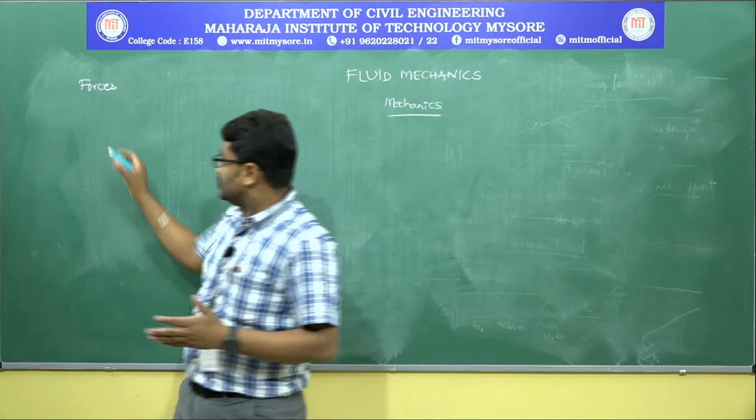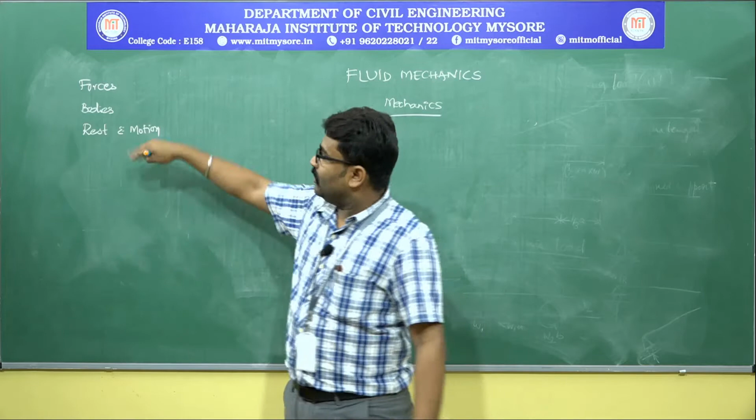You need this word, bodies. Let us see what that is: bodies at rest or in motion. Rest and motion — these are the few things I will take out from the definition. Now I will reformulate, or at least repeat, the definition so I can pick them one by one: Mechanics is that branch of science which deals with the action of forces on bodies at rest or in motion. I have taken out forces, bodies, rest and motion. I will start with rest and motion, then go to bodies and forces.

Now, what is rest and motion? Have you ever heard about it? Rest and motion are said to be relative. That means if a body is at rest, it cannot be in motion, and if a body is in motion, it cannot be at rest. So what is rest and motion?

To study what rest and motion are, you need to know by what method we learn science. We always learn it through two frames: one is time, the other is frame of reference, or space. Basically, it is time and space. So if a body is said to be at rest, it should not be in motion with respect to the frame of reference and given time.

Now if you observe, I am walking in the class. When I walk, what do you say? You must say that this body is in motion. Why? Because this body is not at rest.

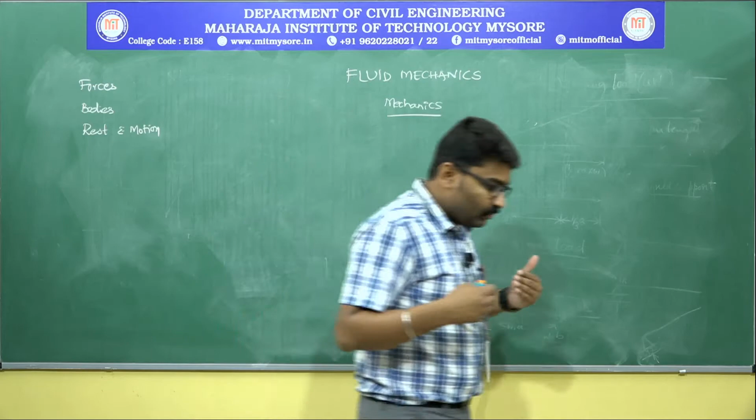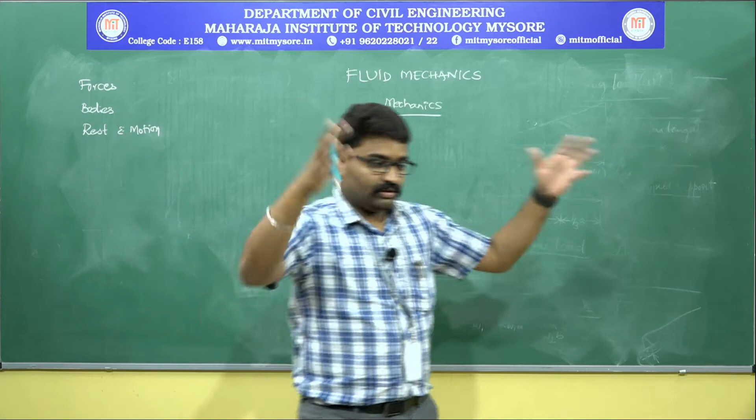From the point where you are seeing, I am moving, but I am situated in a classroom. The classroom is not moving. For a person who is outside this building, this entire classroom is at rest. The body that is moving inside is not visible to him, so this entire room will be at rest for him. So frame of reference or space is very, very important.

And now the same body which is in motion is seen as the body at rest from the other reference. And now after a few seconds I have stopped moving. That means with respect to time, the body that was earlier moving has come to rest. So rest and motion are, that is why, said to be relative.

A body that is moving cannot be at rest. A body that is at rest cannot be moving, but that has to go with the time and space. So how do we define rest? A body is said to be at rest if it is not moving with respect to a particular given time and frame of reference. Similarly, what is motion? Motion is the state of a body which is not at rest with respect to given time and frame of reference.

So now I have told you that after studying rest and motion, I will go to bodies and forces. Even now when I define rest and motion, the body was there. What is the meaning of that body? Anything on this earth which is now considered for the study is supposed to be termed as a body.

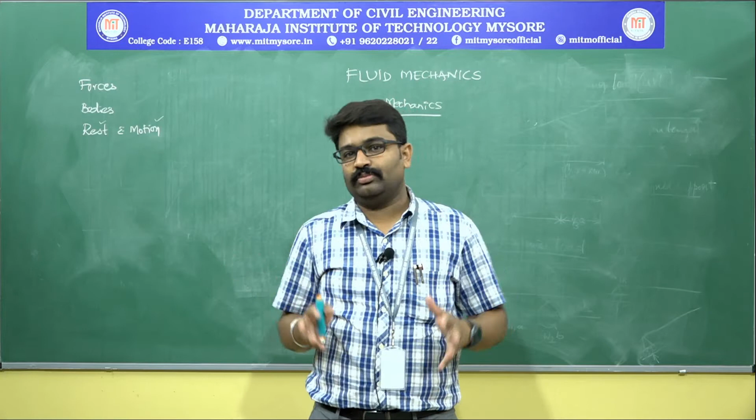A body can be of three types. You know it: solid, liquid or gas. I will come to it a little later because I am still to deal with mechanics.

Now the other part here is forces. What do you mean by force? To know what we mean by force, we will have to dig a little more deeper so that we will know the basics of forces. This is now given by whom? Any action, any external agency that tries to do something can be termed as force.

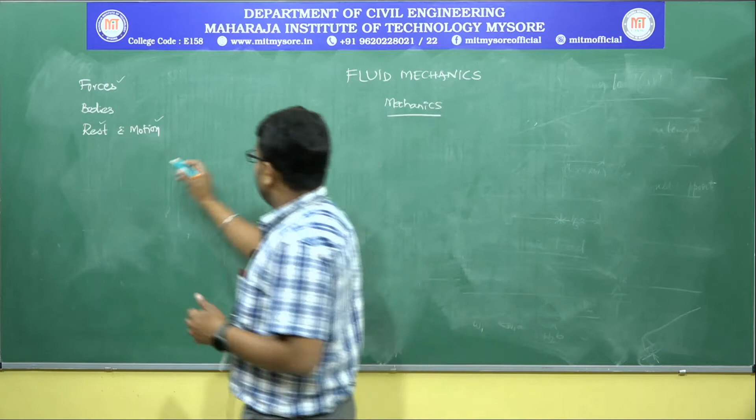Now what do you mean by force is a point of reference for studying inertia also. What do you mean by inertia? Who has given us the content about inertia and force? That is given in Newton's first law. You must have studied this, Newton's first law.

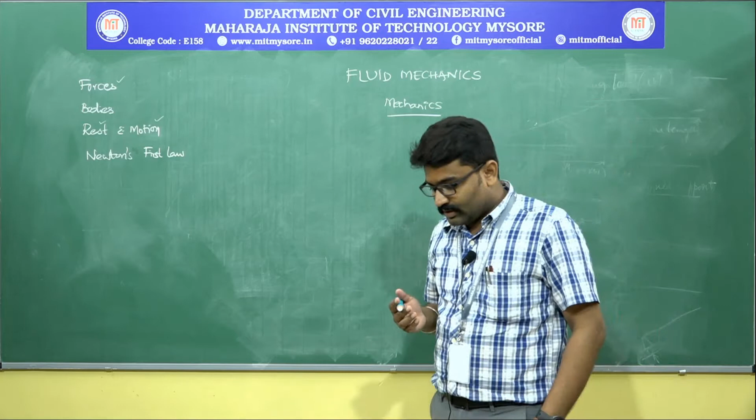What is this law all about? Can anybody remember this? You tell it to yourself because you cannot definitely tell me now. So you can tell it to yourself. What is Newton's first law? Newton's first law states that every body continues to be in the state of rest or in motion unless compelled by an external agency. That external agency is what I am terming as force.

So every body continues to be in the state of rest or inertia, or in motion, unless compelled by an external agency. Say for example, I keep playing on the road. That's an action. Unless I am called by my parents to get in, I will not get in. So that is an external agency. That external agency can be termed as force.

So if you apply some force, it can, see, first time when my parents call, I may not get in. Second time when they call me, then also I may not get in. But the third time when they definitely scold me and call, I will get in. What has changed is the application of force has been changed. The external agency has changed.

So with that I can understand how anything that is applied is a force, but that force can alter the body's nature, or it may try to alter the nature of the body. That means if you are running towards me and if I try to stop you like this, if the force that you are running with is too high, the hand that I am trying to stop you with may not be sufficient to stop your run. So that is only trying to alter the body's motion.

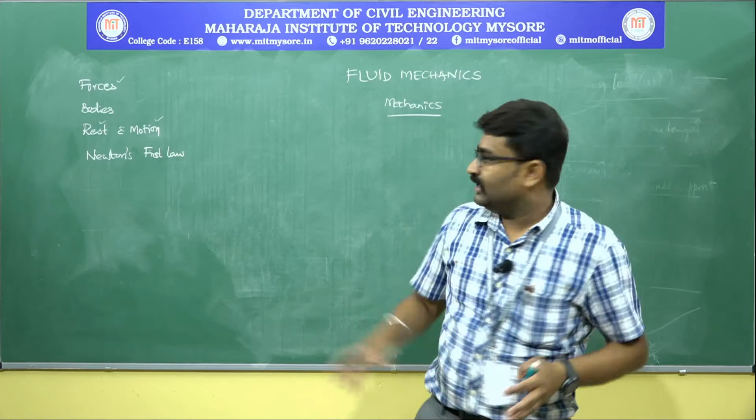And also I may be now asked to lift a big rock. I will try to lift it, but I will not be able to lift the rock. So that is why I am telling that an external agency which is applied on a body may alter its state of rest or motion. If it changes, also it is a force. If it doesn't change, then also it is said to be force.

So now, with Newton's first law, we can now understand the magnitude of force is also very, very important, and the direction of force is also very, very important. I have told you that I will have to lift a rock. To lift a rock, what will anybody do? Even for lifting a paper, say like this, I have a paper in my hand. To lift this paper, what should be done? I will have to give the force from the bottom of the paper. Then only it can be lifted.

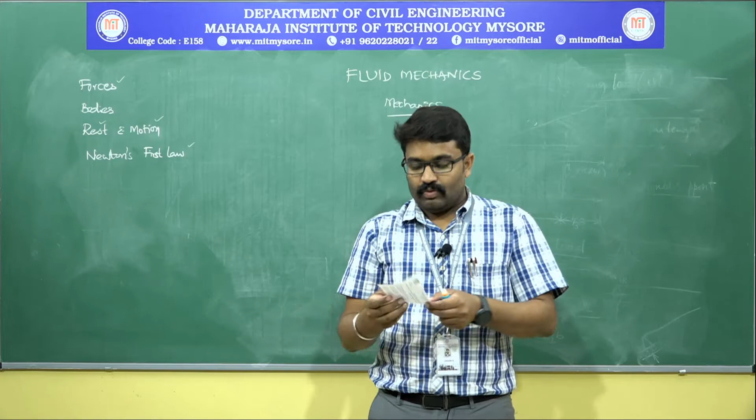So this is the direction of application of force. Instead of this sheet, if I have a 100 kg book or 100 kg block, can I lift it like this? I can definitely try to lift it, but I will definitely not be able to lift it. So what I mean to say here is the force that an external agency applies can try to alter or it can alter. In this case of paper, it has tried and it has successfully altered the position of the body.

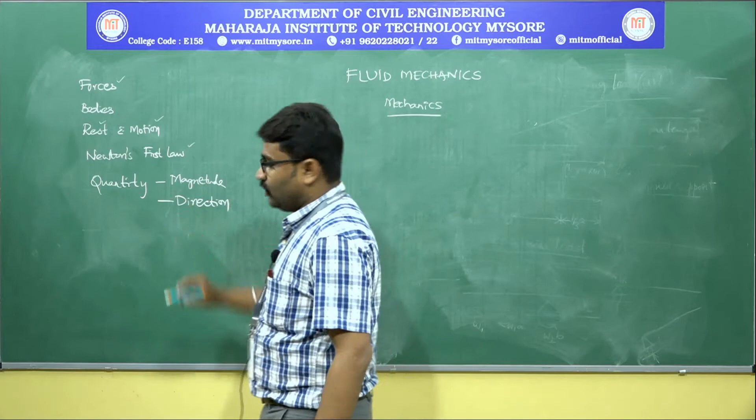Now my point here is, I will have to take out two things from here. One is about the quantity. To quantify anything, you need two things. One is magnitude and direction. So before which I will have to go to the part quantity. What is a quantity? Anything that can be measured is a quantity. How do we quantify? So you have two classifications, scalars and vectors.

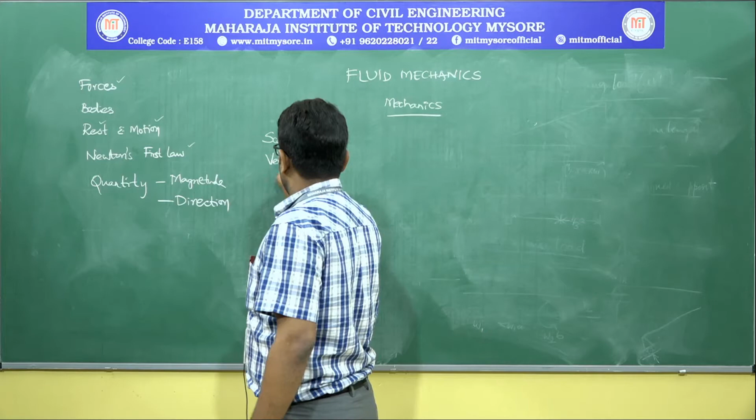What is a scalar quantity? Any quantity that requires only magnitude to represent it is called a scalar. Then what are vectors? A quantity which requires both magnitude and direction to represent it is called a vector. Can you give an example for a scalar quantity as well as a vector quantity? Now I have told you that scalars will have only magnitude and vectors will have both magnitude as well as direction. That is the reason why vectors are also called scalars with a direction.

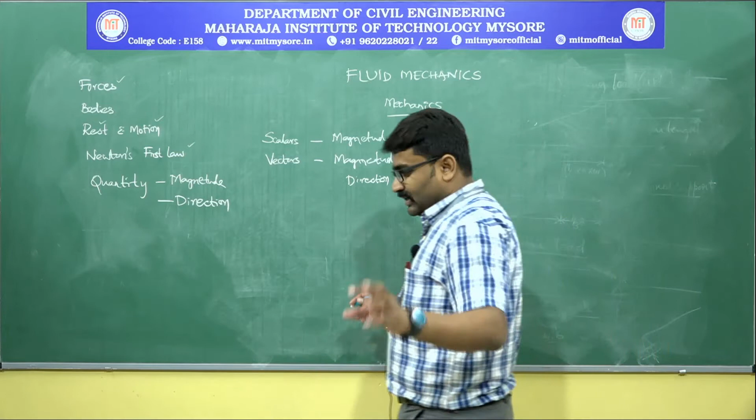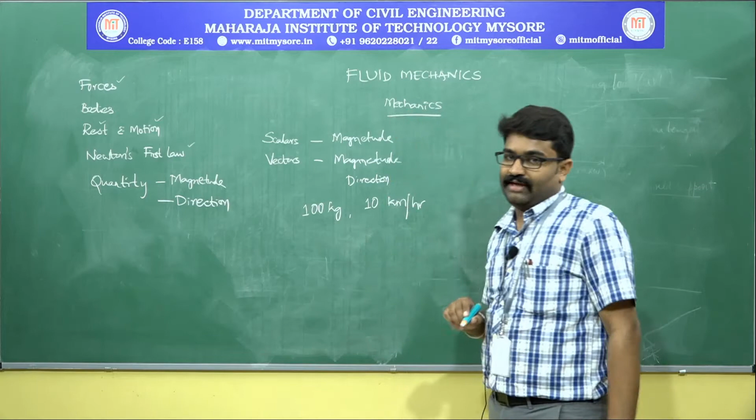Now when I say you have magnitude only to represent them, what does that mean? Let me say that I weigh 100 kilograms and my friend weighs 50 kilograms, and I am running at 10 kilometers per hour. My friend is running at 10 kilometers per hour also. Now I will note it down for you: 100 kilograms and 10 kilometers per hour. These are the two things I have given. 10 kilometers per hour, in which direction I have not told. That means it is only a scalar. So this will become an example for scalar.

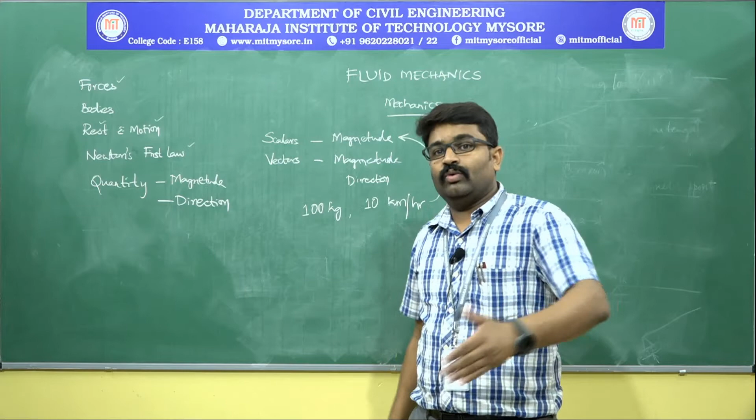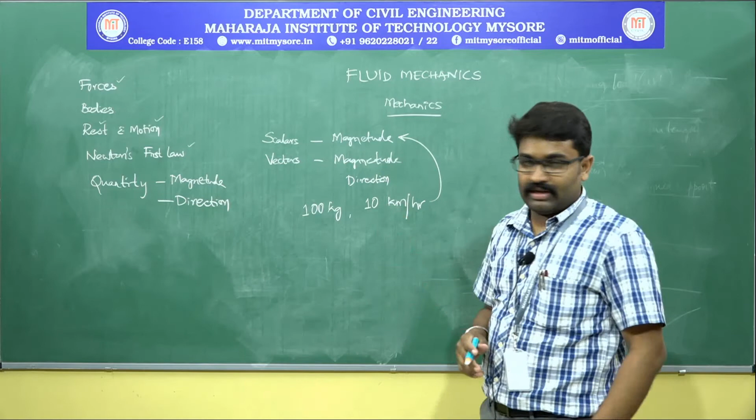Now when I say I run 10 kilometers per hour towards Srirangapatna starting from Mysore, then that becomes a vector quantity, because that is a scalar quantity which has a direction. Now moving ahead, I will have to give you examples for scalars and vectors. So one I have given, that is distance and displacement. Distance is an example for scalar.

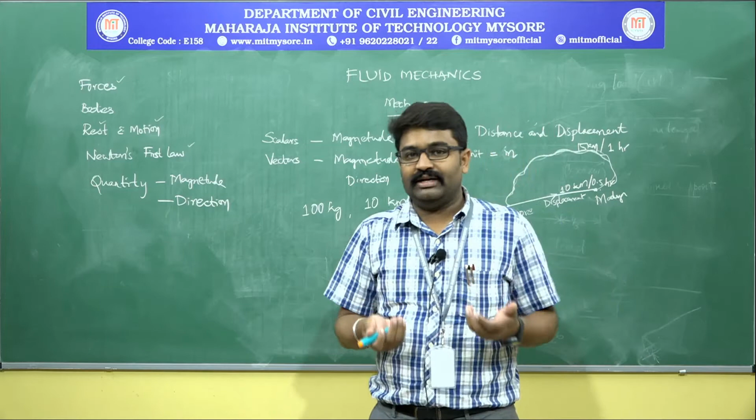Now I will continue further digging into it. I will start from here and cover these 15 kilometers in 1 hour. Say I am cycling, that is why I am taking 1 hour. From Mysore to Mandya, the shortest distance to my college, 10 kilometers, I have travelled in half an hour. Let us assume like that. Now why does this always come combined with time? Because when we are travelling in a bus or train to Bangalore, we say we will reach in 2 hours or 3 hours. That means the 150 kilometer distance between Mysore and Bangalore is covered in 3 hours. So the distance travelled by time taken is called speed.

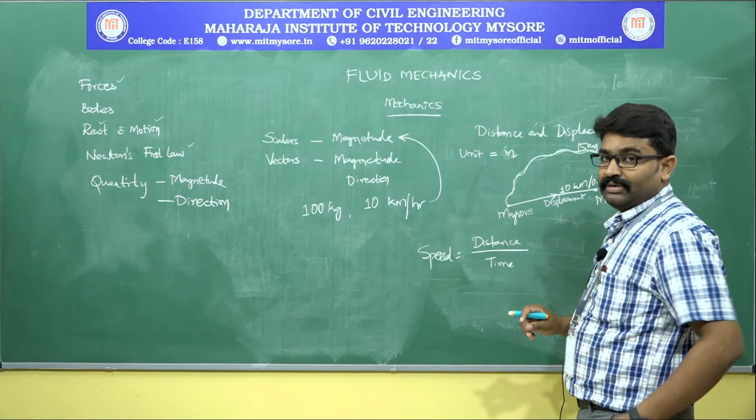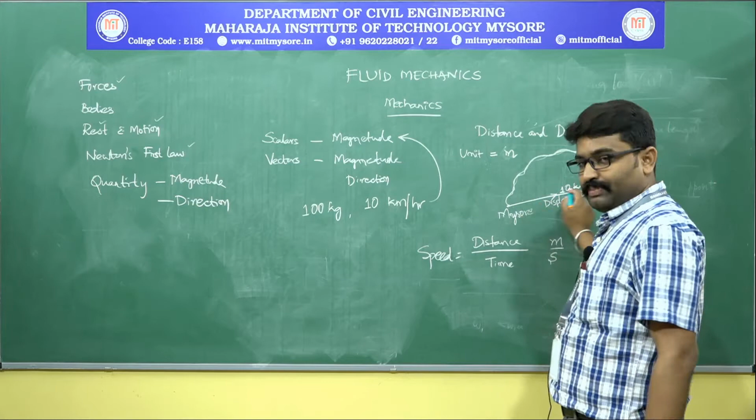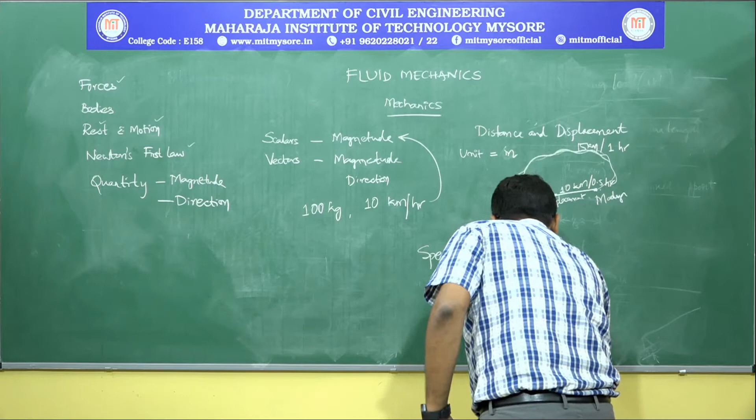Speed is nothing but distance travelled per time taken, or time taken to cover a certain distance. The unit will be meter per second. Similarly, I have told you that this is the displacement, that is the shortest distance between the 2 points. So, displacement by time is called velocity. I have told you that displacement also has the unit meter. So, unit of velocity is also meter per second.

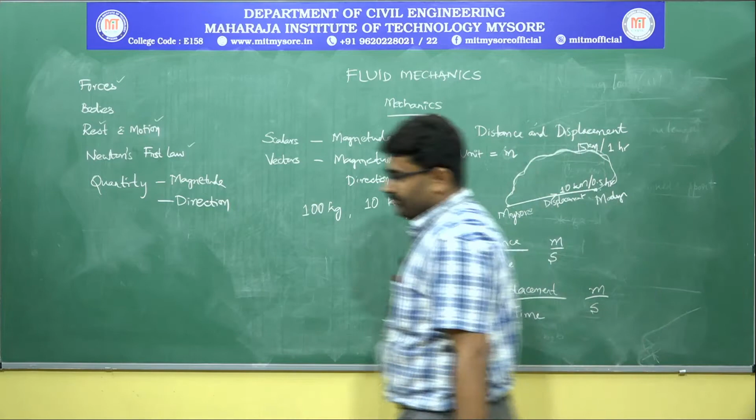So, what have we learned till now is first the definition of mechanics. In that mechanics we had rest and motion, and then we went to forces, studied Newton's first law of motion, and then there came the quantity. So, the quantities that require only magnitude to represent them became scalars, and those which require both magnitude and direction became vectors. I will write them also, scalar and vector. As examples to them, I have taken distance and displacement, and then I took speed and velocity.

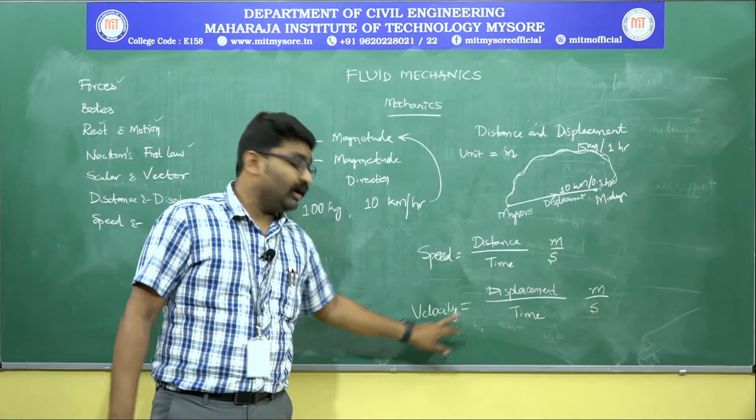Now, can anybody tell to themselves what quantity is speed? Whether speed is a scalar or vector? Speed means distance by time. So, the speed has only magnitude but no direction. That means I am running at a speed of 10 km per hour will only signify a scalar because it is not having any direction. But I run 10 kilometers per hour starting from Mysore towards Srirangapatna has a clear direction as well. So, that means velocity becomes a vector quantity. Speed, velocity, and I will have to next teach you what is acceleration.

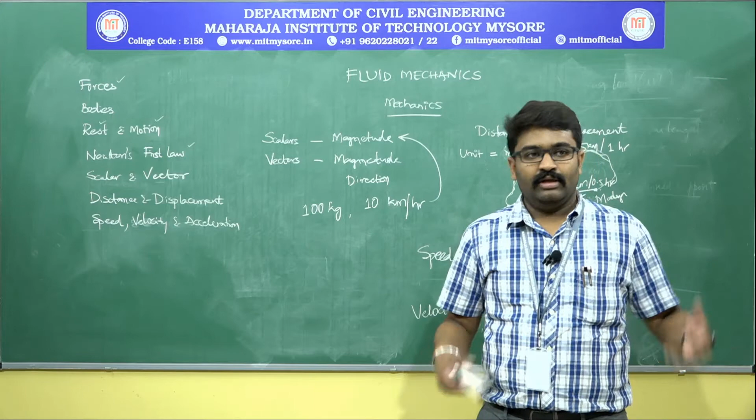Assume that you are driving your vehicle from your house to your friend's house. You are riding at 50 km per hour. Your moped is being run at 50 km per hour. You see an empty road, there are no vehicles from the opposite direction, and you wish to increase the speed. So, obviously you will use the accelerator of your vehicle. What is it actually doing? It is increasing the velocity of your vehicle.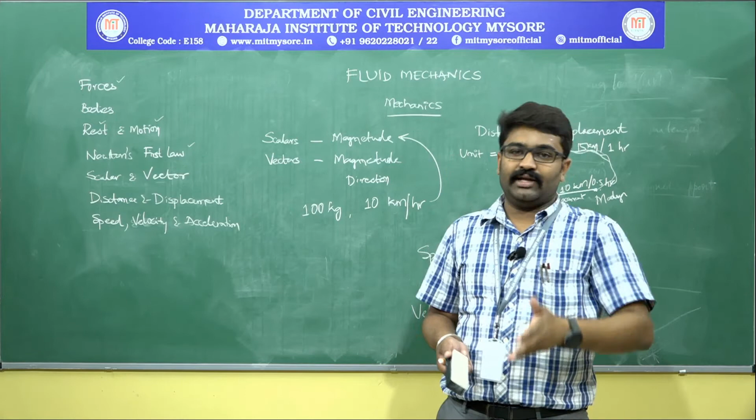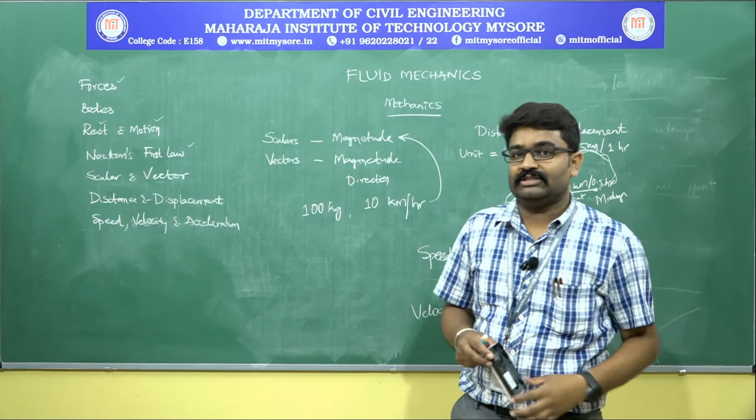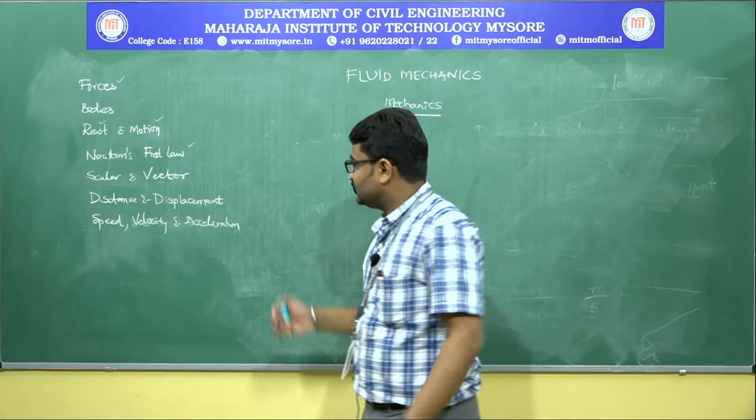Why I say velocity and not speed is you are moving in a particular direction. In the same direction, your speed has to increase. That means velocity has to increase. That cannot be termed as speed because it has a particular direction. Your velocity has to increase in that direction. So, you will accelerate. That means what is acceleration? The same distance is being covered in a short time. That means the rate of change of velocity is called acceleration. The rate of change of velocity. Okay. Whenever you have rate in the definition, you will always have time in the denominator.

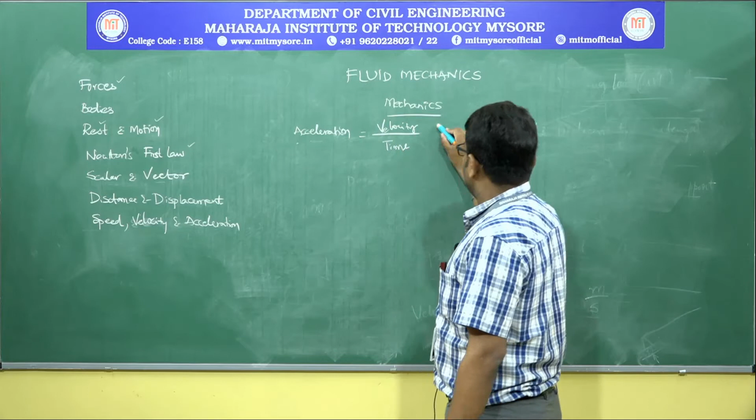That means acceleration is rate of change of velocity. That means velocity is in the numerator, time is in the denominator. So, what is the unit of velocity? Unit of velocity is meter per second, unit of time is second. So, it becomes meter per second square. This is the unit of acceleration.

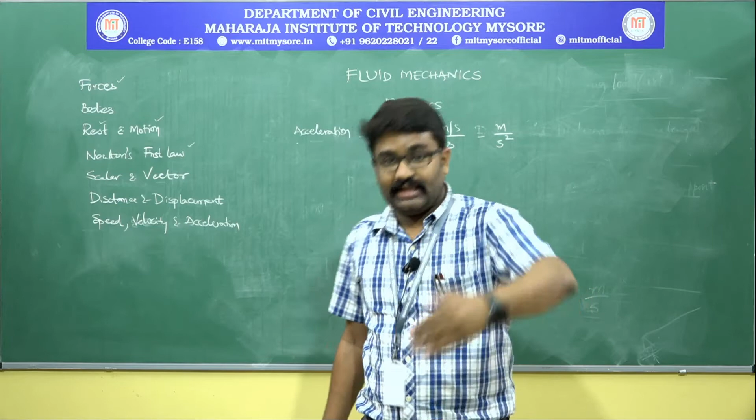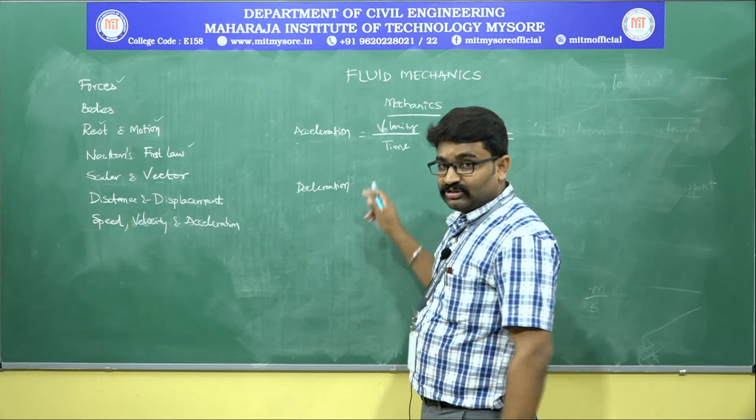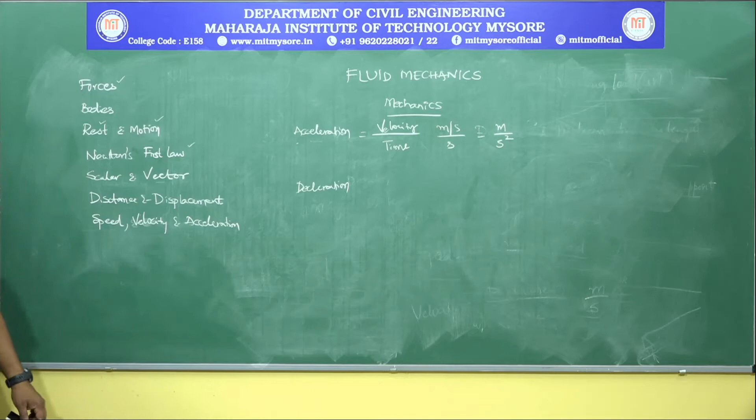Now, I have given you an example of an empty road wherein you would wish to increase the speed, but when there is an opposite vehicle or a dog that comes without your notice, immediately what will you do? You will have to apply the brakes and automatically your velocity decreases, but that velocity is still in the same direction. But whenever you will move in the opposite direction, then it becomes deceleration. Deceleration or negative acceleration, that also has the same unit, but it will come with a negative sign to signify it. So, speed, velocity and acceleration, and next we will move on to momentum. What is momentum?

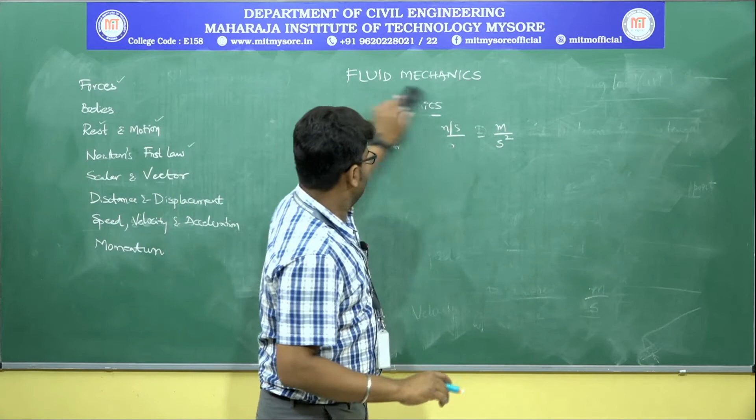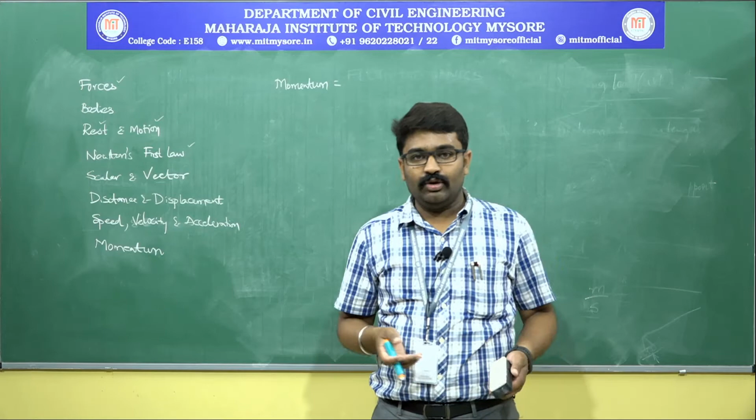I hope many of you watch a cricket game. During the commentary, you might have heard that some ex-batsman has entered the crease and he has changed the momentum of the game. What does he actually do? Say for example, the score of Indian cricket team is at 3 runs per over. Now, immediately a hard-hitting batsman comes on a given good day, he starts hitting the ball and your run rate has increased to 4.5 in 3 to 5 overs. So, by virtue of his capacity of playing good cricketing shots, he has increased the run rate. So, he has brought in some force.

So, momentum is nothing but mass, that means the quality of the player, let us assume, into what has he done? He has increased the scoring rate. So, I will take it as velocity. So, momentum is nothing but mass into velocity. So, what should be the unit of this mass into velocity? Mass has a unit of kg, velocity has a unit of meter per second. So, momentum is mass into velocity in kg meter per second. Why is this important in learning? With the increase in mass, the momentum will change, or if the mass is constant, with the increase in velocity, the momentum will change.

Or basically the definition goes like this: it is the capacity of a body to impart motion to other body or impart force onto other body. In the example that I have given, the batsman has come and started hitting, that has not just improved his batting rate, but also has increased the team's batting tally. That means it had the capacity to impart motion to the other body.

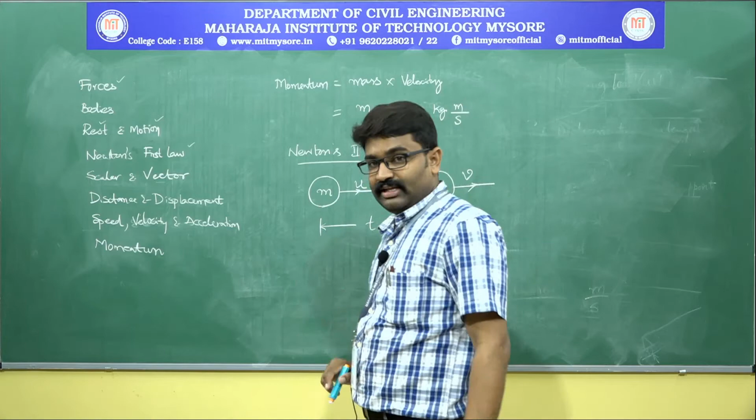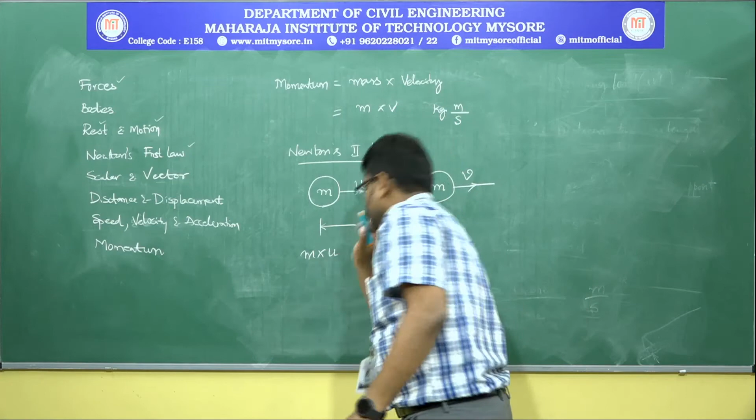So what is the momentum at this point? Momentum is mass into velocity. What is the velocity here? Velocity here is u. What is the mass of the body here? Still m, but velocity has changed to v. What does Newton's second law state? The rate of change of momentum. Be very careful, it is rate of change of momentum. I have only written momentum here, you will have to take the change in momentum. What is the change in momentum?

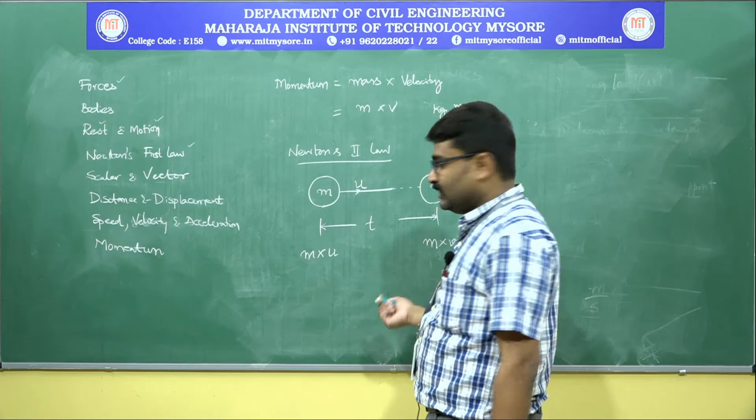Say you score 56 in a subject, and in the next you score 66. What is the change? It is 66 minus 56. Similarly here, change in momentum is equal to final momentum m into v minus initial momentum m into u. But the definition says it is rate of change of momentum.

As I already told you, when there is rate in the definition, you will have time in the denominator. So mv minus mu; I will take m outside, m into v minus u divided by time. The time interval here is t. m into v minus u by t. But what is v minus u? v minus u is change in velocity. In the denominator you have time.

Recall what I taught you in this class itself. This is nothing but change of velocity with respect to time, which is acceleration. So this can be written as m into a. This is Newton's second law. But it doesn't end here, because according to the law, this rate of change of momentum must be proportional to the applied force, in the direction of the applied force. So m into a must be proportional to the applied force.

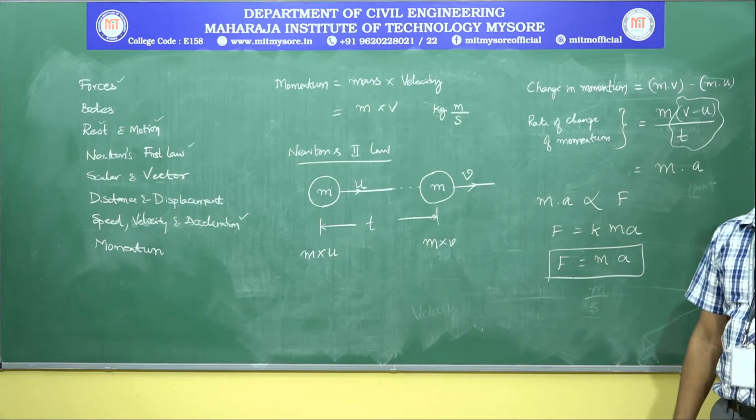To remove the proportionality, I bring in the constant of proportionality: F is equal to k into ma. When k is unity, you have the actual output of Newton's second law, that is F is equal to m into a. This is a very important part in learning fluid mechanics. Please keep this in mind. Force is equal to mass into acceleration.

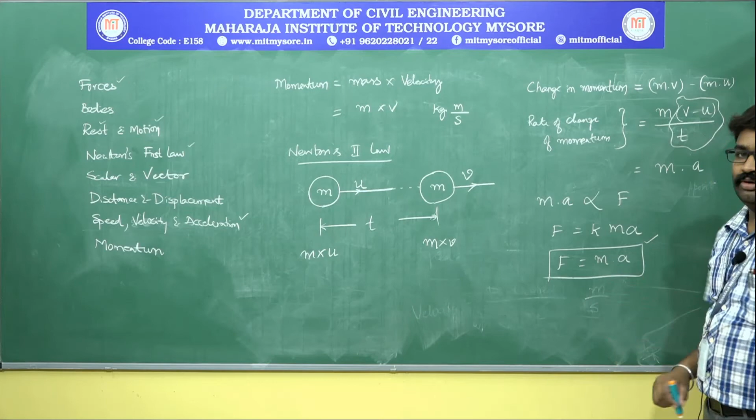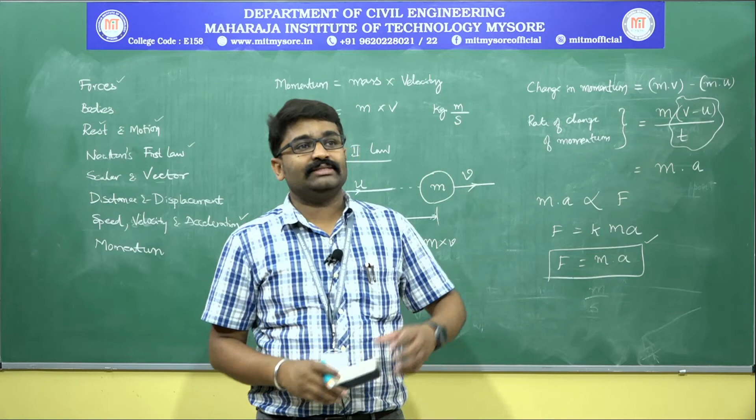You must have already learnt about acceleration due to gravity. Acceleration due to gravity is the pull of the earth due to its gravity, usually termed g. I will come to it later because I will have to deal with mass, weight and volume; when I come to weight, I will tell you why g is important. For the time being, remember F is equal to m into a. So after momentum I will write Newton's second law.

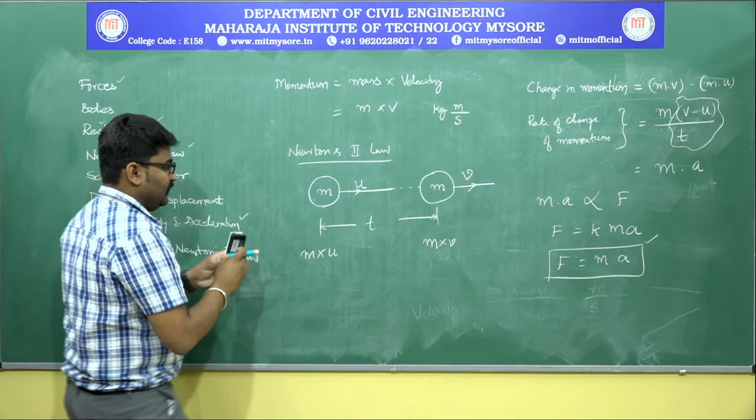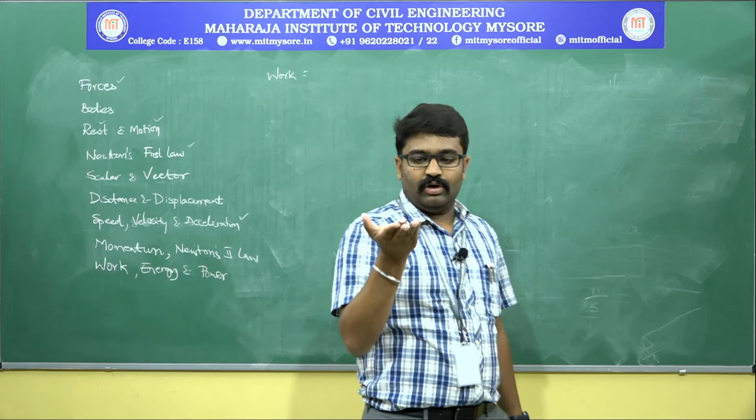Next, in the basics you will have to know about work, energy and power. We'll first take up what is work. Now I am holding a piece of chalk in my hand. This is work, and if I have to place this from here to here, this is also work. If I have to place this from here to here, then this is also work.

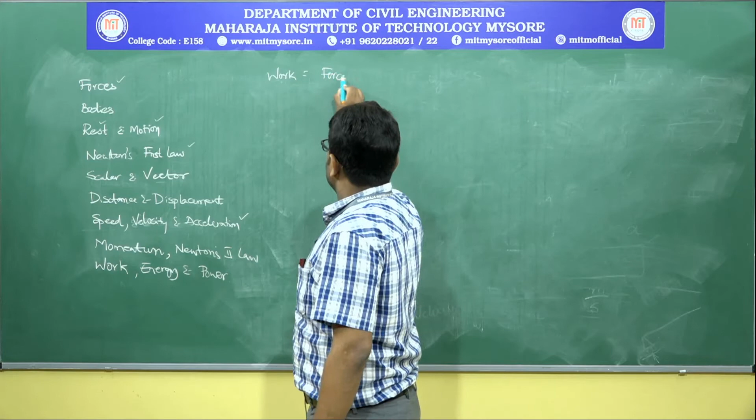Basically what is being done here? Basically I will have to be able to lift this piece of chalk and move. So some force is required, and with force what is happening? Now force is being applied to do what? To displace this from one place to other place. Now I have gone backwards, now I am coming forward. So there is a displacement, clear displacement. This is happening because of the force being applied.

So work is nothing but force into displacement. Force into displacement. Force has a unit called Newton that came because of the previous derivation that I have done. Newton's second law, wherein F is equal to ma came, that was found by Newton. So force has a unit of Newton, that I did not write. If you want I will show.

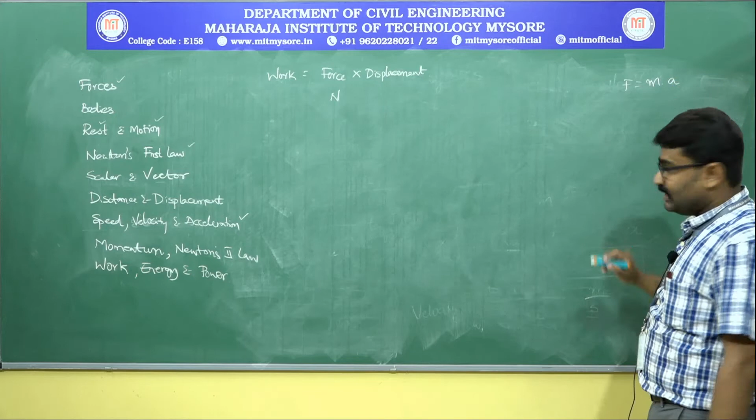F is equal to m into a was the output of the previous derivation. M is in kilogram, acceleration is in meter per second square. Since Newton found this, put together this is called Newton. So force has a unit of Newton, displacement is in meters. So work has a unit of Newton meter.

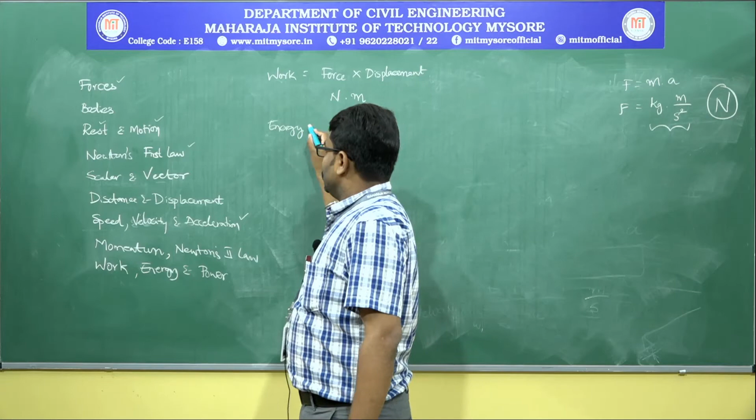And next in the line I have energy. What is energy? Energy is nothing but the capacity to do the work. That means any work can be converted into, in fact I will have to go the other way, any energy is nothing but the work. The capacity of doing it is called energy. So it has the same unit, Newton meter. But in energy you have two famous types. Everybody will answer this. One is kinetic energy, the other one is potential energy.

What do you mean by potential energy? Potential energy is the energy gained by virtue of the position of the body, whereas kinetic energy is the energy gained by virtue of the motion of the body. So potential energy is dependent on its position, where h is the height, that means the position of the body. Mg is nothing but the weight of the body, whereas kinetic energy is half mv square, where v is the velocity. It depends on mass and velocity of the body.

And finally you have power. Rate of doing work is called power. Whenever there is rate, I have told you that in the denominator you will have to have time. So what do we have to have in the numerator? It is rate of doing work. That means work. Work by time, that is nothing but Newton meter per second. So this is nothing but the power, rate of doing work.

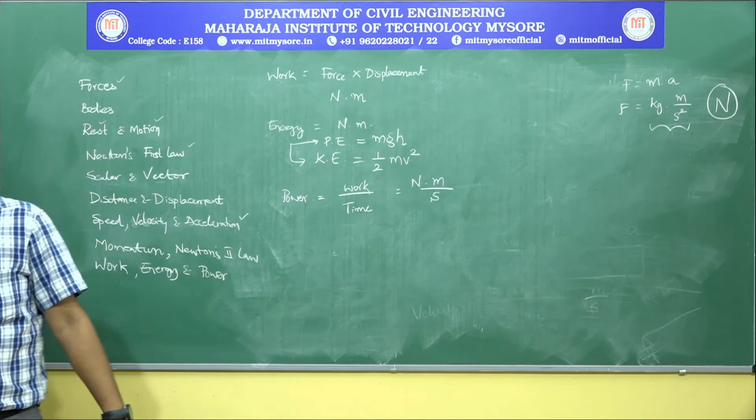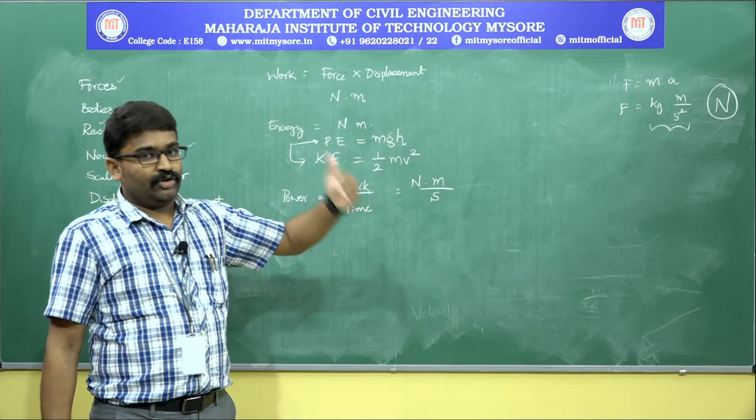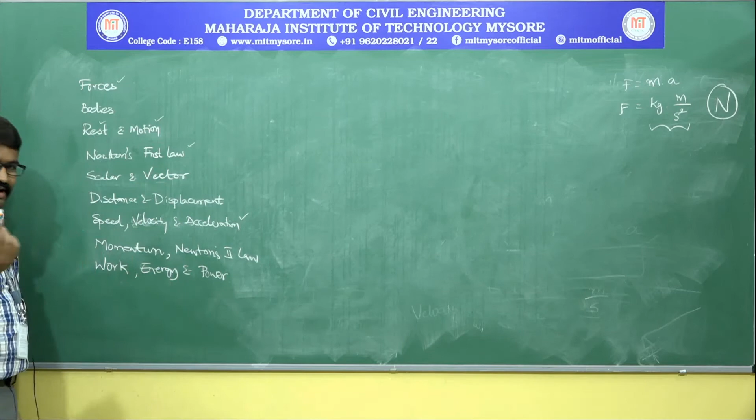So these are the few concepts that you must know before entering into the other part of the title of the course, that is fluid mechanics. I have just elaborated about or taught you about the mechanics part of it, and now we will move on to the other part, fluids. Before I get into fluids, I think I must also let you know what is mass, weight and volume, because I have already used mass as well as weight in this class itself.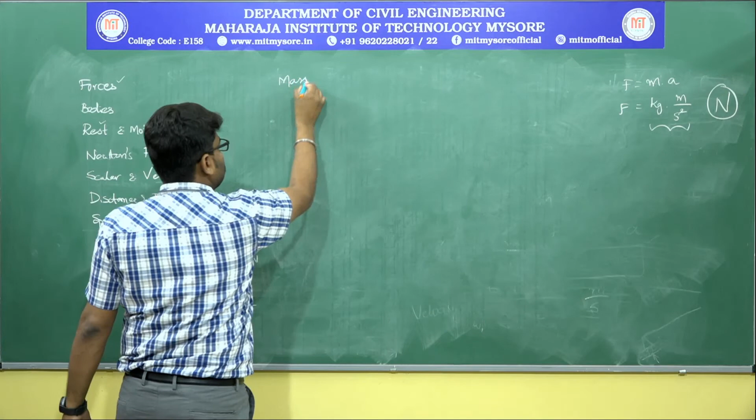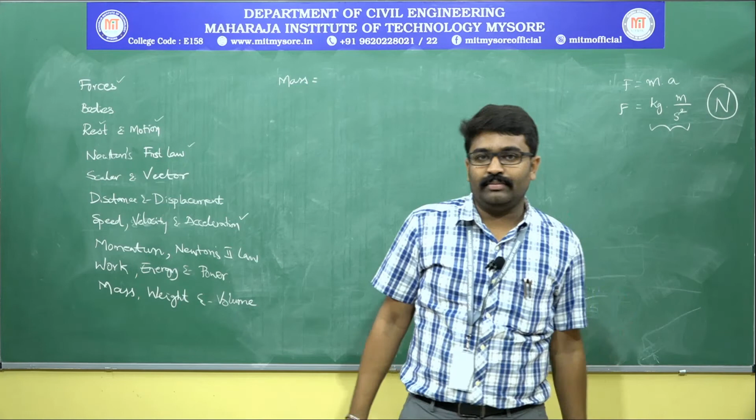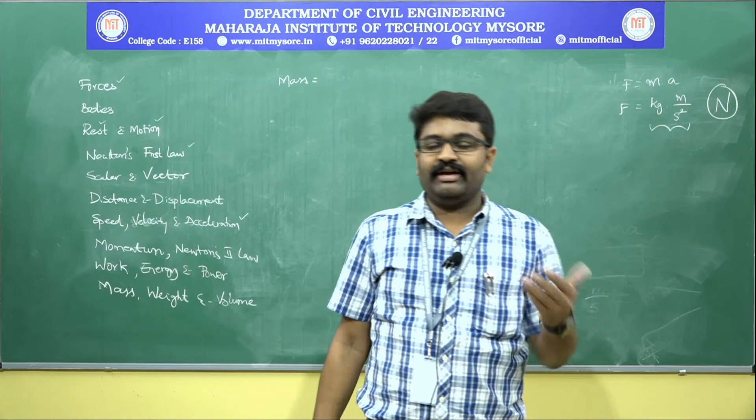What is mass? Okay, I'll have to pose a very simple question here in Kannada, "nim tooka estu." This is a common question that you will come across. What does that tooka mean? That means, is it a synonym to weight or mass? That is the question that must rise. Whenever somebody asks us what is your weight, the quick answer would be say 80 kgs. Is that correct? That you will learn now.

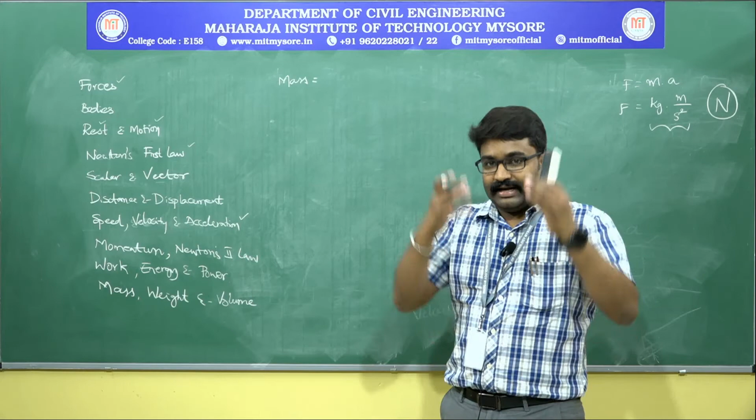That is basically incorrect. What we are answering is mass and not weight, because mass is the measure of amount of matter contained in a body. Say this is a body. I am made by what? Blood, other muscles, bones, all those things. It is the measure of amount of matter contained in this body, and that doesn't change. If I jump, my mass doesn't change, because the amount of matter contained in the body doesn't change.

So what we answer whenever we are asked about our weight is actually the mass. Unknowingly we are doing that. We will have to change from now, but people will not accept that answer. I will tell you why. Mass is the measure of matter contained in a body, and its unit is kg.

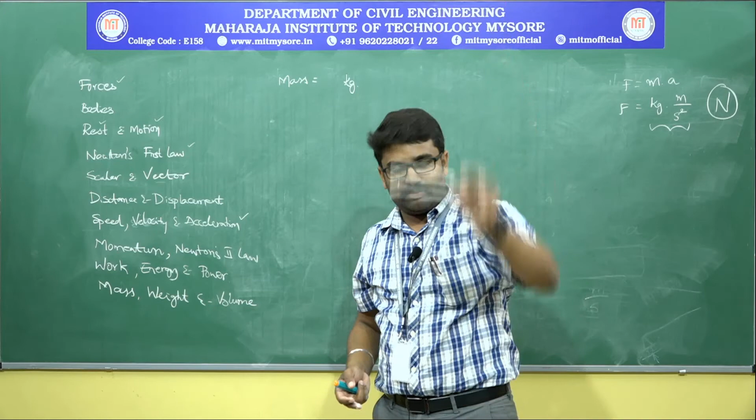And now if I throw this duster up like this, it has to fall down. Why is it falling down? It is falling down because of the acceleration due to gravity. But does the mass of this duster change just because it went up and came down? No. So mass is not changing.

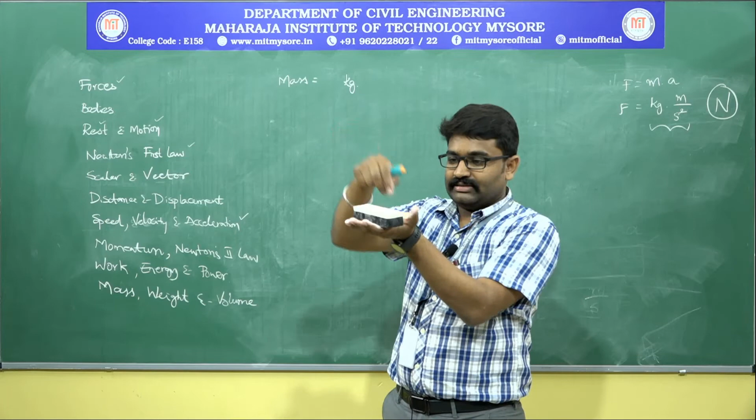But what is changing? Say for example, this duster, when I lift this up and put it down like this, the force that I am feeling on my hand is less. But when I put this up from a greater height, the force that I feel here will be different. And now this same mass is multiplied by the acceleration due to gravity; mass is m, acceleration due to gravity is g.

You must now relate this with Newton's second law, which said F is equal to m into a. Here instead of F we will write weight. That means to say weight is a force. How? Because this is mass multiplied by acceleration. Here acceleration due to gravity is the only change. So this must also be in terms of Newton.

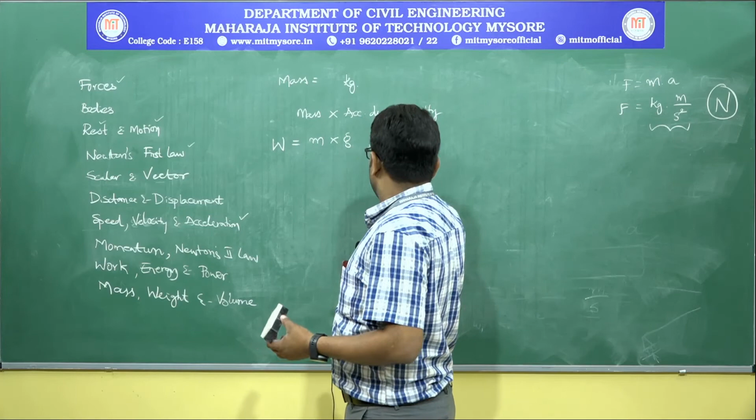So what is the difference between mass and weight? Whenever somebody asks your weight, if you put it in terms of Newton, people will laugh at you. Don't do it. But as a civil engineer, you must know this fact. Weight has a unit of Newton, and mass multiplied by acceleration due to gravity gives weight.

And then finally you have volume. You will all have seen the sumps in your houses or water tanks, or to give you a bigger picture, the lakes. Since you reside at Mysore and near Mysore, you have many tanks. Kukkarahalli Lake, Karanji Lake. All those things have a capacity to store something.

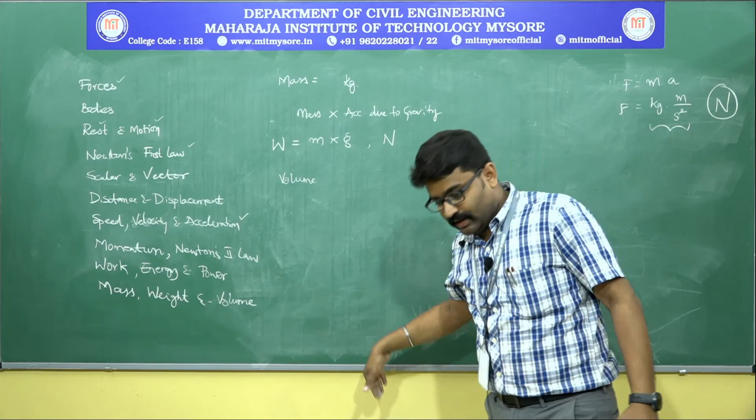Now in the room I am standing in, if you observe, this is one dimension, the width of the class, let us assume. Then the height of the class is also visible, and then you have the length of the class. These three dimensions put together will give you volume, or basically area multiplied by height will also give you the volume. So this is m into m into m, that is equal to m cube.

Since the subject that we are going to study in future is fluid mechanics, I will give you an example of a sump or tank. How much is the volume of the sump? This is an activity that I am giving to you in this class. Go to your sump, measure the length, width and height of the tank or sump, and multiply them. You will get the volume of your tank, and that shall be in meter cube.

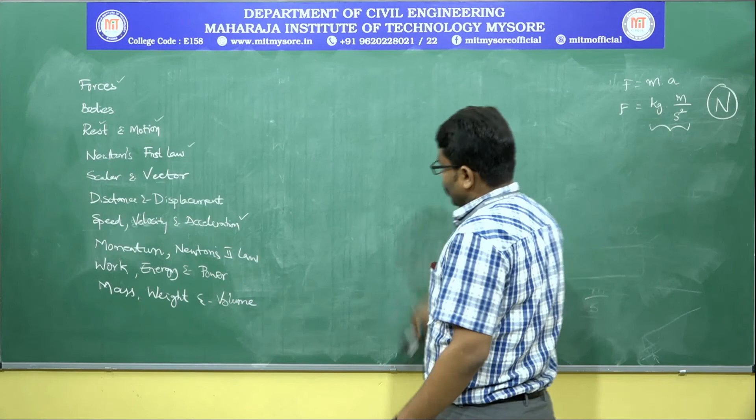Now I will move on to the last part of this introductory class, wherein I will be dealing with fluids. As I have told you, I have completed a few basic things about mechanics. It is also important for us to learn about fluid. Before I get into fluid, I will have to tell you about the states of matter. While I spoke about bodies, I told you that anything available on earth can be taken as a body for the purpose of study. Then what are the types of materials that we have on earth? All those things are bifurcated into only two parts, solids and fluids.

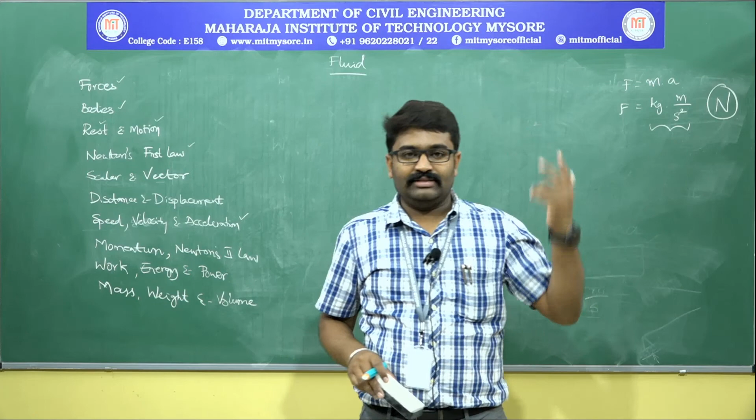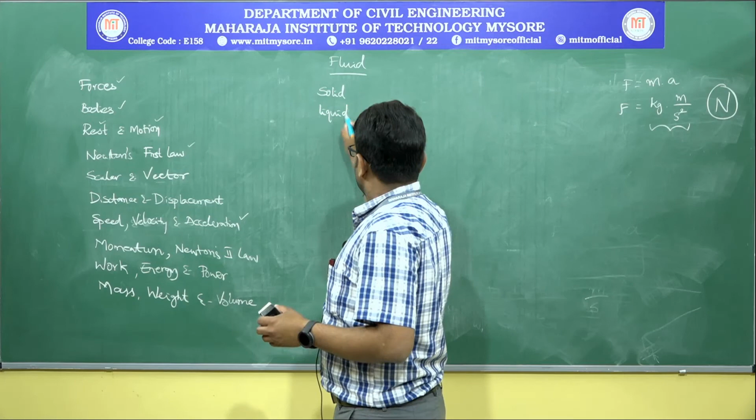But as a beginner in science, you would have been taught there are three states of matter, that is solid, liquid and gas. Basically, anything that has the capacity to flow is called a fluid. Both liquid and gas can flow, so we have put them together and we will call it fluid. So there are only two states of matter, one is solid, the other one is fluid.

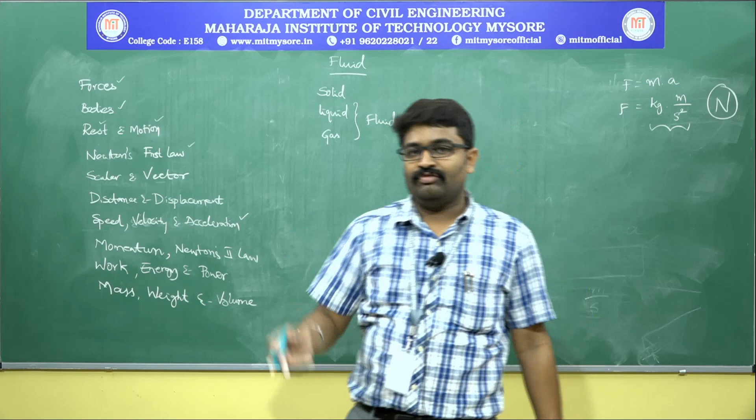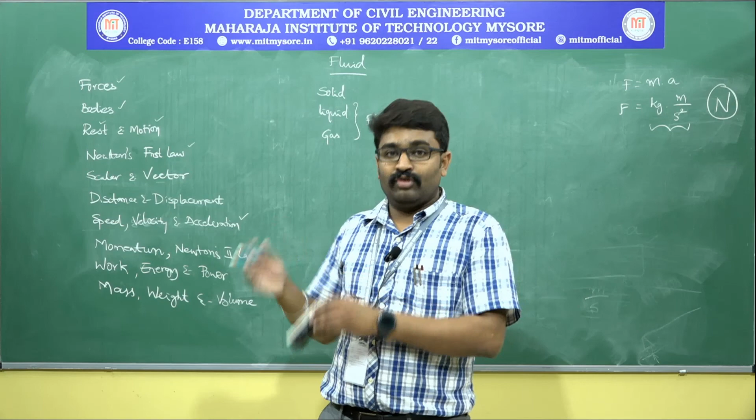Now I have already taught you what mechanics is. What is mechanics? I repeat, it is the branch of science that deals with the action of forces on bodies at rest or in motion. Remove that body from there, put solid, it becomes solid mechanics. You remove solid and put fluid there, it becomes fluid mechanics. So what is the definition of fluid mechanics? Fluid mechanics is a branch of science that deals with the action of forces on fluids at rest or in motion.

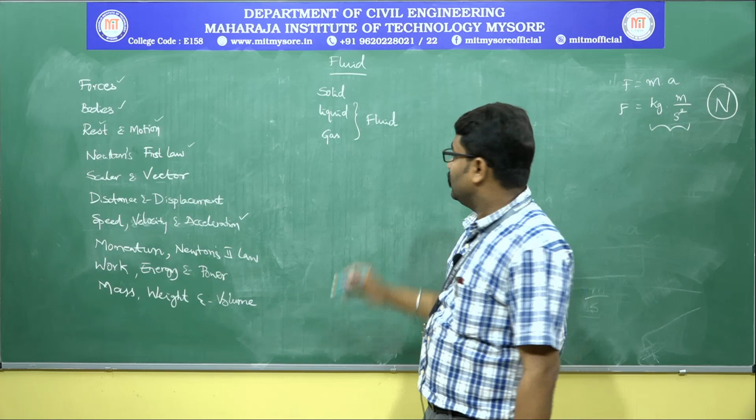If we put solid, it becomes solid mechanics, and you study it as strength of materials in this third semester itself. What we will be dealing with is fluid mechanics. What is that? I repeat, the study of action of forces on fluids at rest or in motion. You will also have to learn about three engineering properties through which you can know better about fluids, and that will be taught to you in the coming classes.